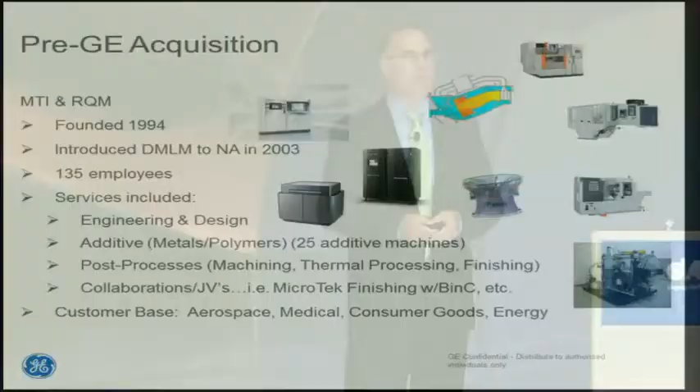That was really kind of the first company to say we're going to take this technology and put it into the production arena. And we were able to do that, and I'll get into this, because we found confidence in the technology. But in November of 2012, GE Aviation acquired both of our companies, and we rebranded ourselves.

So now what was Morris Technologies, we now call our Additive Development Center. The mission remains the same — we have prototyping, R&D activities, and then RQM has been rebranded our Lean Lab. GE has a series of Lean Labs, and that's the industrialization and productionization of the process.

So it's basically taking the process, or any technology, any of our advanced manufacturing technologies, and moving it from R&D, starting to scale, and basically handing it off to a production facility. So that's how we look at our progress, or how we look at advancing technology through the corporation.

We're very lucky that we have the Global Research Center. They have multiple sites around the world. We deal quite a bit with Niskayuna, New York, and what they do is a lot of TRL and MRL levels 1 through 3.

In the additive space, that's where they sit, and then the Additive Development Center for Aviation really looks at those TRLs, MRLs, probably about 3 to somewhere around 6 or 7. And then our Additive Lean Lab takes it up right before production, TRL 9, and hands off at that point to our production site.

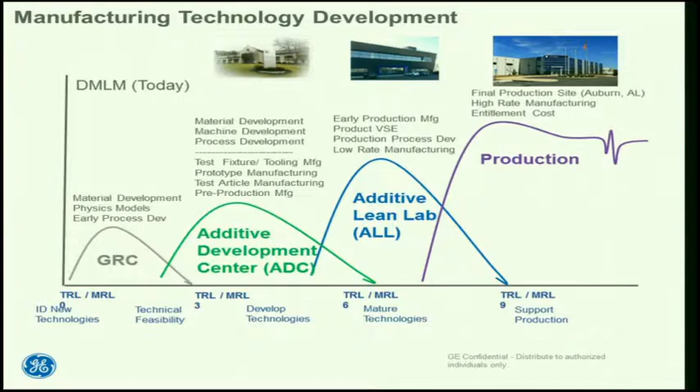So we have the GRC, we have the ADC, we have the ALL, we have our cousins in Italy that are very focused, a portion of their business is focused on additive and electron beam melting in particular. And then just a couple of weeks ago at the Farnborough Air Show, we formally announced where our first production site is, and that's going to be down in Auburn, Alabama. So that is where we will produce our fuel nozzle, which I will also talk about here in just a minute.

GE Aviation has clearly been leading the charge relative to additive internal to the larger corporation. But as everybody probably knows, GE is a large industrial conglomerate. So we have businesses in power and water, healthcare, oil and gas, transportation, appliances, and all of these businesses are starting to leverage and use additive technologies. That can be additive metals, polymers, and other types of materials.

The point is, all of our businesses have really started to leverage this technology in a variety of interesting ways. Some are using the technology more for the prototyping part and phase of the process. But folks like power and water, oil and gas, and aviation have not only leveraged and used it for prototyping, tooling and fixturing, but we are clearly taking the technology into a whole other realm, which is production and direct production of components using additive. In our case, the first parts we'll have on our engines will be additive metal components.

So look, I don't want to make an assumption about everybody's understanding and familiarity with additive. So let me, for those who are familiar, just give me a few minutes to go through this. But really, the technology works in this way.

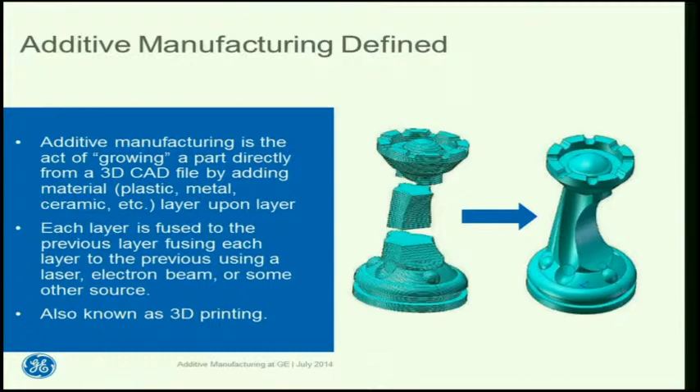Once that part has been completed and built, we then pull it out of the machine. We typically go through a post-thermal processing, so a stress-relieving operation, typically HIP, solution heat treat, that type of thing. Once it's through the thermal processing, we pull the parts back. We typically will have some post-machining to get good fit-up capability and tolerances in certain areas. We might hand bench the parts to get a better surface finish. Then we inspect, and then we can ship the parts.

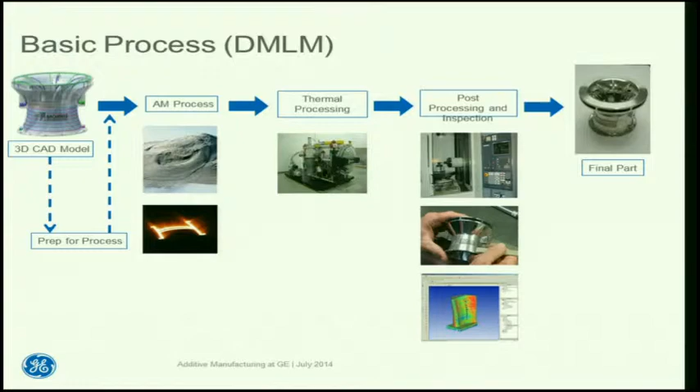Depending on the complexity, parts can be large, they can be small, they can be complex — typically complex and typically small right now given the state of the industry. But once that's done, we're able to ship parts within perhaps a couple days up to, say, a couple of weeks. I'll go through a few examples where the timelines are a little bit longer depending on what the project was. All right, so if we can go ahead and roll the first video here.

What I want to show you on this video is, in essence, the electron beam process. There's no sound on this, so you get to hear me drone on through this video. We're going to take an example — of course, we're aviation, and I'm borrowing this from Oak Ridge. They didn't do this for us, but I'll take this example of a turbine blade.

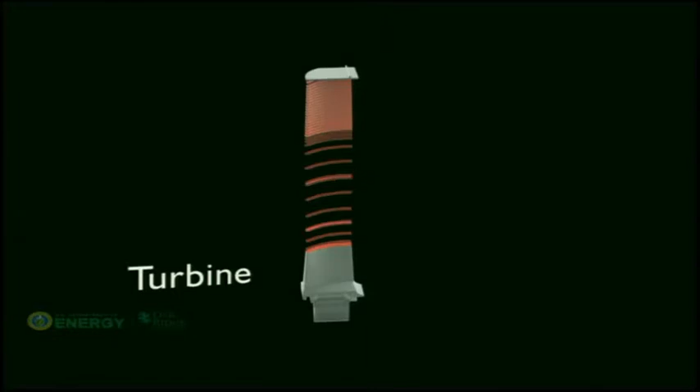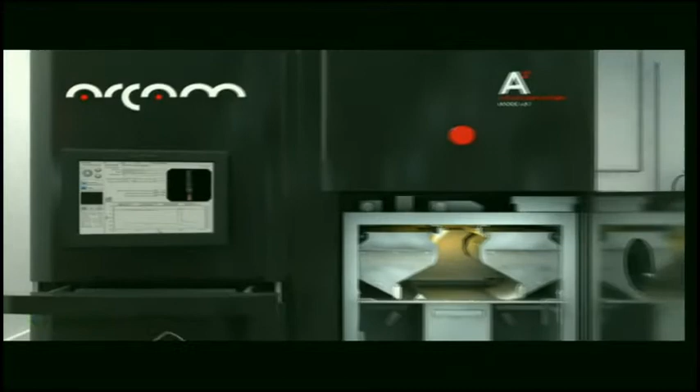If you take a model of a turbine blade, we slice that part up into thin layers, and you can see that's being done on CAD right now. That part is then downloaded to the machine. Now, the way the electron beam technology works is it goes into a chamber where you have those buckets that are coming out.

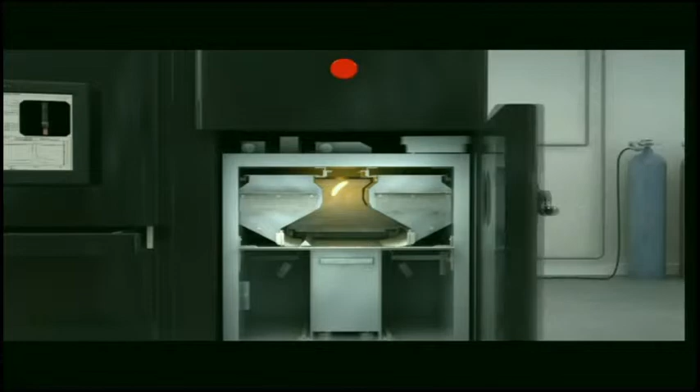We fill those material dispense areas with titanium in this case. We close the door, and the electron beam works under vacuum, so then we pull vacuum.

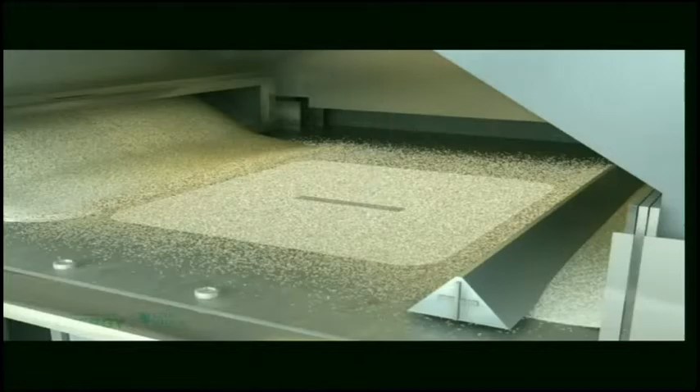That helps us eliminate oxygen, et cetera. The first layer gets swept over, and we preheat every layer. That's one of the unique things about electron beam technology—you can preheat each layer and then precisely come down and melt in the X and Y the area you want to form. That process repeats itself.

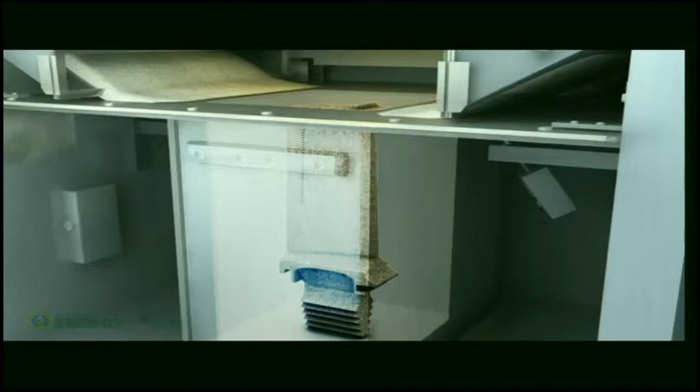The preheat allows us to work with alloys that would crack, things we couldn't easily work with in laser-based processes. Of course, we can work with titanium, Ti-64, in laser as well as EBM, but in some geometries it's faster in the EBM process.

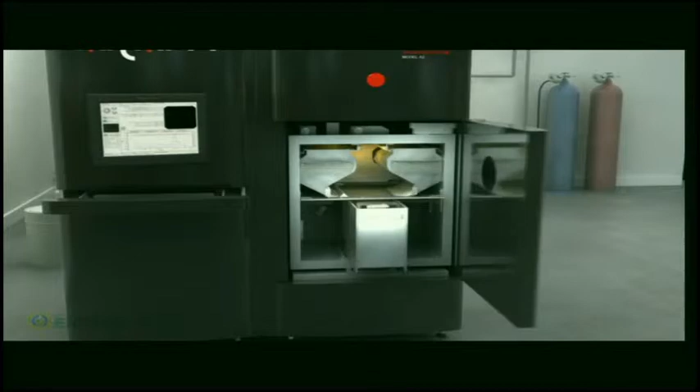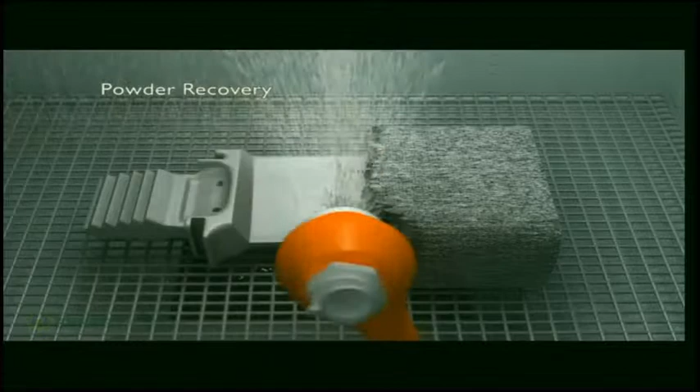Once the part's done, because we preheat every layer, one obstacle is that it comes out as a brick, because the material that wasn't fully melted needs to be blasted away using the parent material. Once that brick is removed and goes back to powder form, you're left with your solid part as a three-dimensional component.

The beauty of that is with Arcam and EBM technology, we can build things very quickly. We're dealing with 3,500 watts of power, directed much like a TV cathode, so it can jump the beam very quickly. Contrast that with laser, which typically has 200 to 400 watts of power in their machines.

There are pros and cons to each technology. I'll tell you that, in my opinion, not one technology is the winning technology. I think they each have their areas and their niche where they should play. I just used that video because it illustrates the general process of additive and slicing files, et cetera.

Let's talk a little about some of the different types of additive. On the polymer side, this isn't comprehensive at all, but the well-known technology that sort of started things out in the 1987 timeframe is stereolithography, or SLA, created by a company called 3D Systems and a gentleman named Chuck Hull. Other technologies have come from that—fused deposition modeling, selective laser sintering, and the polyjet technology.

All of these are polymer oriented. The materials you typically see are like plastic injection mold materials—ABS-like or polycarbonate-like. In FDM we can also do ULTEM. In fact, in the Additive Development Center at GE, we have the ULTEM material and fused deposition modeling—we have all of those technologies except selective laser sintering. Our appliance cousins have the SLS technology.

The beautiful part about these technologies is we went from an industry where, in the early days with our first SLAs, we'd produce components that would shatter if dropped a few inches off the table. They were very brittle, and the material properties weren't very good at all. Still, it was revolutionary to hold a complex part in your hand, but nowhere near where we are today—the materials we have today are highly functional.

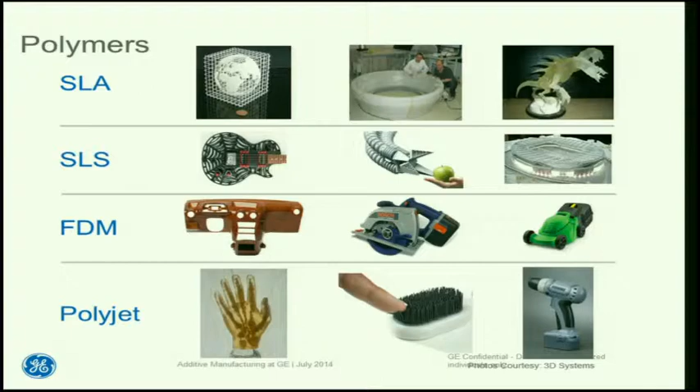We see people using these materials in a variety of applications. Within GE Aviation, we use plastics for a lot of fixturing, and some early tooling—for example, with advanced technology like our CMCs, we can use it to make early tooling. It's not as accurate as the final machined steel tooling, but it gets us far enough through the process to get early looks. There are also a ton of other technologies coming out—I'm not trying to be comprehensive here, but nano is another area that's very big.

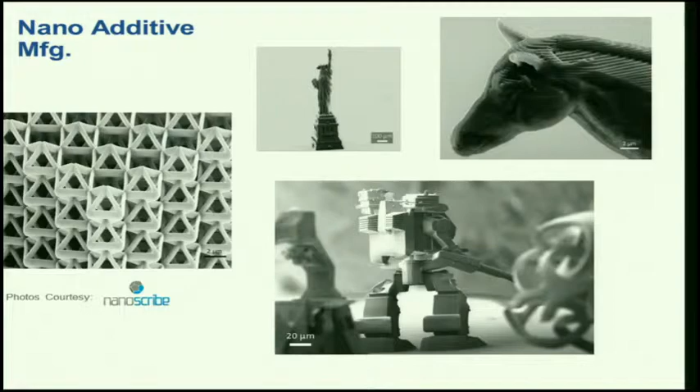So it's hard to see the scale here, but that horse head, that little line on the neck of the horse, that's 2 microns. So you can see that nano additive is another technology that some industries have quite a bit of interest in. The medical industry is a good example. We also see other technologies where we can print in color.

So no, that's not a real orange, and it's kind of a spooky face. But basically what happens in this technology, it's paper-based, produced by a company called MCOR. You can take normal 8.5 by 11 sheets of paper. They bond one layer to the next with glue, and a little knife comes around and cuts the profile of that layer. It also cubes the rest of it, and you pull the cubes away after your build. But you can print in color, so that gives you some capability.

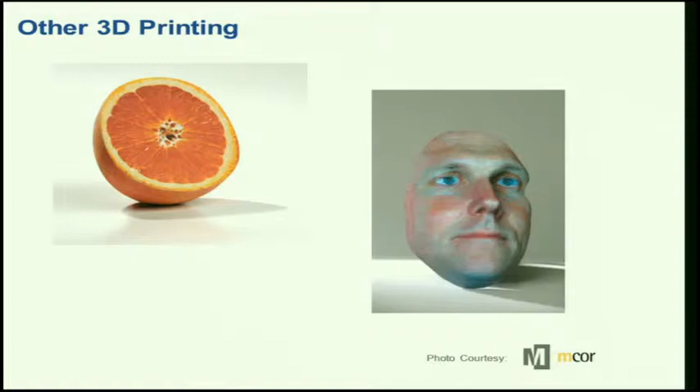Now, we don't use this technology in aviation, but you can see where if you were trying to do a 3-dimensional representation of an FEA model or something, this is a pretty inexpensive way to go. So technologies like this exist as well.

On the metals front, this is where I will spend more of the presentation time and where we see more of the applications within GE. The metals are very broad. I'll get into more of the machines, but you can see the type of applications.

Most importantly, if you look in the middle picture and see that organic bird bone-like structure component, that's the kind of thing our engineers and designers are starting to look at more and more. It's not how I've designed and created things in a traditional manufacturing methodology. We need to think about how nature wants to potentially drive the design and the mechanics of what that part should look like.

So in the case of the middle part, imagine if that had been a solid part with tubes coming in one side, maybe it was a casting before. If we can still get the same mechanical properties out of that part but reduce the weight by 50% or more, we have a substantial benefit. And on any kind of flying hardware, whether going up in space or to a commercial or military application, weight and fuel savings is a tremendous opportunity that we're actively looking at.

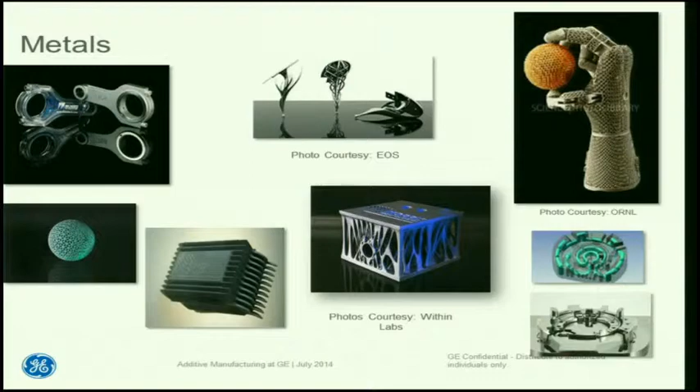There's other pictures up here, some unusual designs around heat exchangers. You can see a tooling example where you have conformal cooling. So for those who get involved in any kind of tooling, whether for plastic injection or other, you can see where that could be very beneficial to reduce your cycle times.

When we talk about metals only, this is something important to understand. When we first brought the technology of direct metal laser sintering over to North America in 2003, this chart would have had maybe a couple of boxes on it. This chart now has a number of boxes, a number of modalities.

So we have direct and indirect to metal. In the direct, we have a number of different capabilities beyond just laser based. We have laser base, we have EBM base, we have powder bed, we have powder fed or powder injection, we have wire fed. So there are a number of different metal additive modalities.

One of the important things to understand is that no one technology, no one manufacturer or OEM of these technologies will probably fit the full spectrum of parts you might want to make in metal. So it's really very important to understand the nuances, the pros and cons of each of these.

By and large, broad brush, the powder bed laser-based technologies are more prevalent by far as an installed base in the world. I think you'll find a growing number of the electron beam in different forms starting to come out. And I think you'll start to see some of the hybrid machines and some of the laser-fed or powder-blown type of technologies increase in popularity, mainly because you can do larger structures and near-net shaped parts with those.

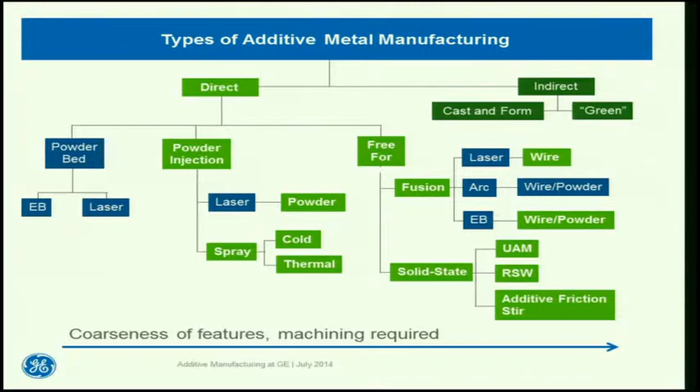So, great technology. We look at it as being disruptive. We look at it as being very enabling. But I will tell you that design matters a great deal, and I touched on this before. Let me give you an example.

On the left, what you're looking at is a traditional, what we call panel-style rake. That's an instrumentation probe that we put into our test engines. So that rake takes data. It collects data such as temperature, pressure, or emissions. What you see is the completed rake, and then a cutaway of what's inside. It's called panel-style, you see little panels in there.

That's not a traditionally manufactured one, it's actually additively produced. But it was designed to be traditionally manufactured—tubes bent, sheet metal bent and folded and welded, fabricated basically. So it was really a multiple of parts coming together that were fabrications to create this rake.

Back in 2005, we were approached by one of the engineers in our test facilities engineering area, giving us this file and saying, can you build this part? We said, sure, we'll give it a shot. So we tried, and the machine promptly crashed on us. We restarted, did some tweaks, and restarted another build, and that crashed. I'll save you all the multiples, but it came down to about 11 or 12 tries before we finally got this thing to build, with a lot of little tweaks to the design.

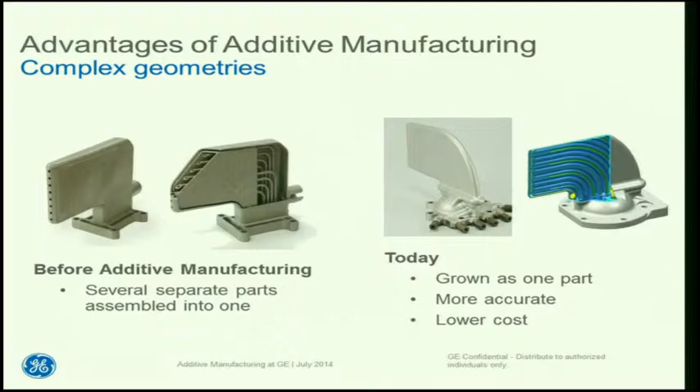And this has been very, very successful. We have all the functionality—in fact, an even better rake. It costs less, we have fewer rakes to make because it lasts longer in the test, and we have better cooling of the skin. We put all this complexity into the rake and have a very sophisticated piece of equipment that can grow first-time yield. It's a very interesting path and a good story about how you generally can't just take a traditionally designed component or assembly and expect to additively produce it. You will probably need to design around some things.

So fast forward, taking some of that concept of designing differently—some of you may be aware that about 6 to 9 months ago, maybe a year, GE went out and did a design innovation quest. We went out to the world and said, okay, here's one of our brackets that we use—you can see it has a little GrabCAD logo over it. Here's a bracket we have in aviation today.

It's kind of chunky and big, and here are all the constraints we put around it. So we went out to the world and said, can you, those signing up on GrabCAD to look at this, come back with a design for this challenge that you think will be lighter but still meets all the mechanical requirements of that particular bracket?

We had over 680, probably closer to 700 entries that came back. We took the top 10 and actually produced and grew the designs that came back. You can see some of those—they really are very creative.

Some of these were engineers, some were non-engineers. These are people coming from all different industries. They were not just aerospace—in fact, the majority were not aerospace.

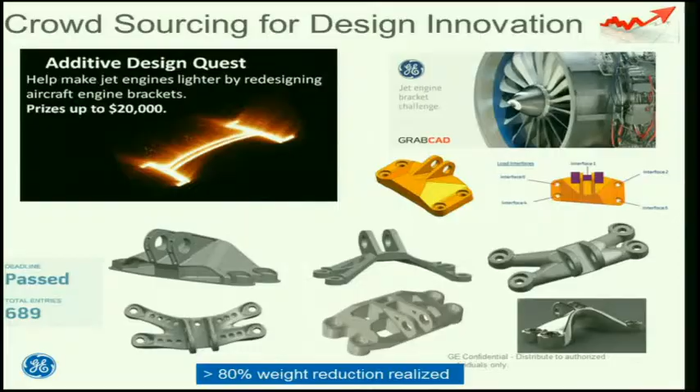So what we had was a community of people globally coming back and saying, okay, great, yeah, I can take that bracket and take a lot of weight out. In fact, we saw roughly an 85% reduction in the weight of that bracket versus how it was traditionally designed at aviation. Applying additive concepts, we were able to reduce the weight and keep all the mechanical properties.

I don't think I'd be here talking, and I don't think we'd have all the things I just showed you, if it weren't for the materials we use and the great properties we're getting out of these materials. So I'm going to make a very broad brush statement, and this is dangerous, but I'll do it anyway.

So the materials typically that we see coming out of the machines are wrought-like in their properties. I'll have a few slides following here which I'll show you.

They're wrought-like in their properties, which gives us a huge amount of flexibility. So all of those parts that have been castings, we feel very confident, with the exception of maybe very, very high-end, like single crystal castings. But most castings, we feel very confident we can take this technology and apply it to those types of parts.

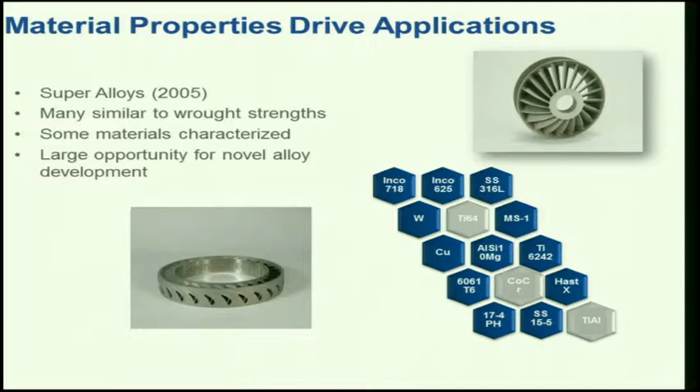In aviation, as many of you would expect, it's a lengthy and costly process to develop your material curves. So we really only have a few that have been fully characterized and that we have our curves on. However, there are a number of alloys that we work with in prototyping, which are perfectly fine, and then we have others that are not up here that are in development. I'm aware that a lot of work is being done at universities, industry, and the government on some other alloys that would be quite interesting.

So let's take a look at a couple of these alloys. This one happens to be cobalt chromium, and I'm not a metallurgist, so I'm not trying to take a deep dive here. In fact, I'll go pretty quick.

There's a reason I don't show high cycle and low cycle fatigue, and that's because it does get a bit of a debit, and that is due to the surface finish that you have on internal passages.

So, of course, one of the advantages of the additive technologies is you can make these really complex parts. You saw a few of those. Our fuel nozzle is a classic example of how we have this very complex internal geometry. So that's great, but it's not so great that I have a rough surface finish on the inside. That does give me that fatigue debit.

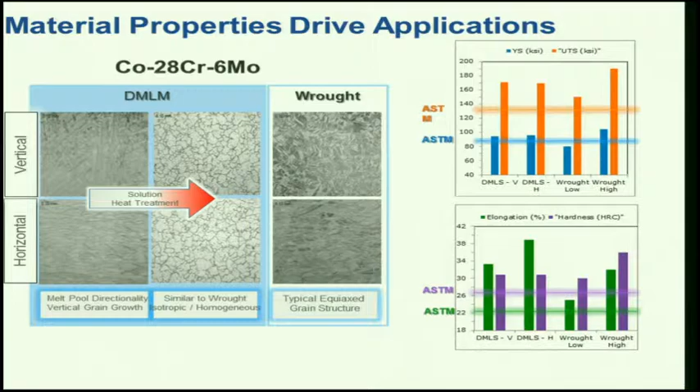So you would see that lower than ASTM standards in this case, and it would not meet the wrought type of lifing. However, the beauty of additive is you can design around that in many cases until we come up with some really good solutions on how to finish internal passages. External's not a problem, it's the internal that's usually an issue.

All right, this is Ti 6-4, similar kind of graphs and similar eye chart in some ways. And once again, you'll see how I've now included EBM. I've got laser-based and DMLS technology represented. And once again, the grain structure looking very similar to what a wrought grain structure looks like.

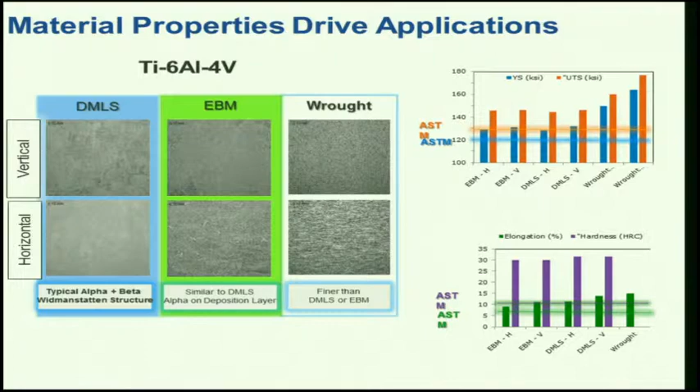So, you know, we have varying degrees of how close to wrought we get, but I would say, again, very broad brush, we certainly get better than cast, and you can understand the benefits that could bring.

So let's switch gears, talk a little bit about what we're doing at GE. So the first thing at GE Aviation in particular, first thing I would tell you is we have a number of machines that we work with. So on the polymer side, we've got SLA, we've got FDM, we've got the PolyJet technology.

On the metal side, we have 5 different modalities we work with at our aviation site. So we have manufacturers of equipment: EOS, SLM, Concept Laser, Phenix, and the Arcam technology.

When GE bought Morris Technologies and RQM, we predominantly had the EOS technology, with a couple different generations of machines. We had about 20 of the metal machines when they purchased us, so we still have predominantly the EOS technology.

But we're very interested in trying to understand the nuances between these technologies. Seemingly, you would think you'd get the same output from a machine that has a similar laser, operates in a very similar way, with similar powder size and morphology. So why would the output be different? It is different, not dramatically, but it does have differences, and we're trying to understand what those little nuances are between the technologies.

I suspect some of it's the software, how the laser is driven, where the laser jumps around on the platform. But there are probably a few other hardware reasons as well.

We also have on the polymer side, I mentioned we use Ultem, that's through our Fortus FDM machine. And we do use the SLA and the PolyJet for some cold type test models, as well as mock-ups, and then also a lot of fixturing. So we've been able to find a number of applications.

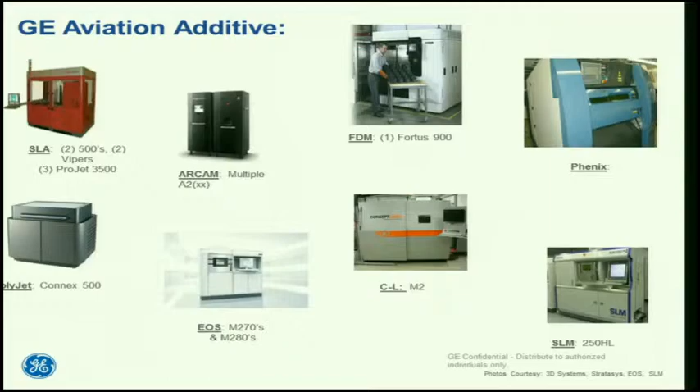In fact, in Cincinnati, there's a company that worked with Oak Ridge National Labs. The company is called Cincinnati Inc. They are known for their large fabrication production-oriented equipment. They've married up to create what they call BAM, a big area additive manufacturing machine, I think. It's very big, probably the size of this stage, and it can lay a lot of material down very quickly.

So they use an ABS with a carbon fiber impregnated into that, and they're having some very good success making big parts that are near net and that are composite. So we'll start to see more of that in the future, I think.

All right, so we talk a lot about the machines, and they are the heart of what we typically think about when we think about additive. But historically, as Morris Technologies and as aviation, we recognize there is a lot on the back end, after the parts come back from thermal treatment, that you have to be very proficient at.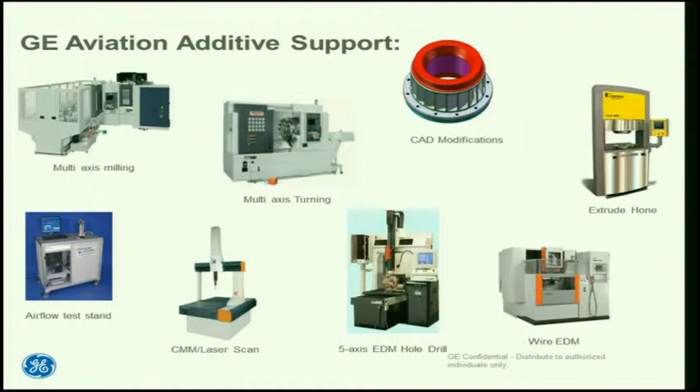Let me say that differently: if you don't have machining capabilities and you're jumping into the additive metal game, you will find it exceedingly difficult to play in that game. You have to have very competent and good capability on the back end, whether that's EDM, CNC machining, or special processes like extrude hone, laser scanning, or even special finishing processes. You have to have the full capability. If you don't, then you will have a rough time getting parts turned quickly.

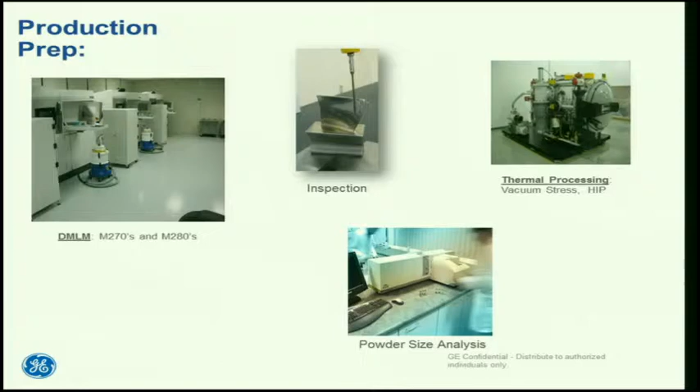And then a couple of things around our prep, industrialization, and production prep. So we have our machines typically live in a controlled environment, not a clean room, but a controlled environment. We have capability on the thermal processing, and we also have capability when it comes to powder size analysis. I will tell you that the morphology and the particle size do matter greatly in these technologies. So monitoring the health of your machine, monitoring the health of your feedstock, all of those things become very important as you think about going into production.

So we have been there, we are on that journey, and it's very interesting to see all the differences between prototyping and production. There are a number of them, and a number of things that have to be T's crossed and I's dotted.

All right, so I think we know hopefully a lot of the advantages of additive. One of them is clearly a huge time savings: the ability to take that schedule we all have for producing components on a project and move some of that back to the left. That becomes a cost savings too.

But on numerous occasions, we have been able to demonstrate we can take things that were going to take weeks or even months and reduce that down into days or weeks.

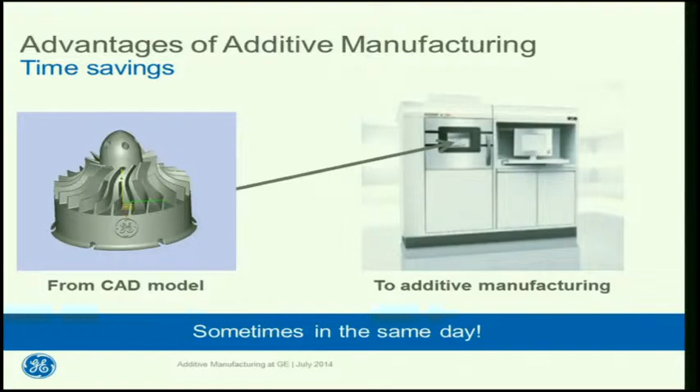High pressure turbine blades typically are produced as a single crystal casting. They have very extreme environments that they live in, and to date we have not seen additive be able to live in that environment for high pressure turbine blades. There are other parts of the engine, like low pressure turbine blades, that might be a good fit, but not high pressure.

However, for test purposes, where we only need to get roughly 300 hours of testing in order to get the data we want, high pressure turbine blades produced additively is a huge cost and time saver. So we can take what normally would be a 12-month cycle to produce those blades and squeeze that down to potentially about 3 months. That's a huge time saver.

And then, of course, we can produce parts that have high complexity to them, like our fuel swirler for our power and water cousins, or a combustion component. So we use the technology internally at Aviation quite heavily for our new product introduction or prototype hardware. That's a big application of how we use it.

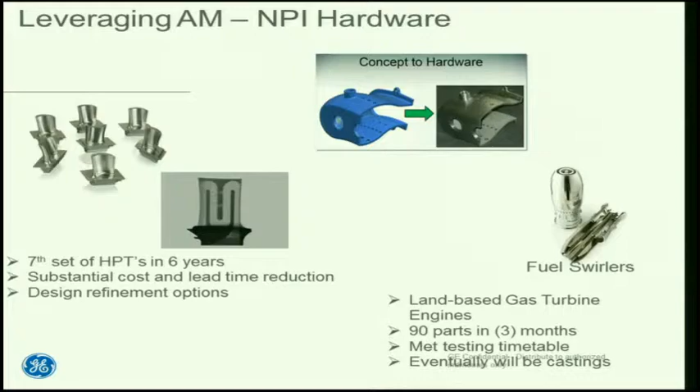But we're not stopping there. In fact, when we look at an engine, we look at a lot of different areas where potentially the technology can be used. I won't go into all the different items on our docket that we think will be the next product to make it to production.

But these are areas in the engine that I think are worth looking at for additive. They range from the compressor area to the combustion, some of our structures, certainly externals, although not HPT blades, but LPT blades potentially, and various installations. So a lot of areas in the engine are great candidates for additive.

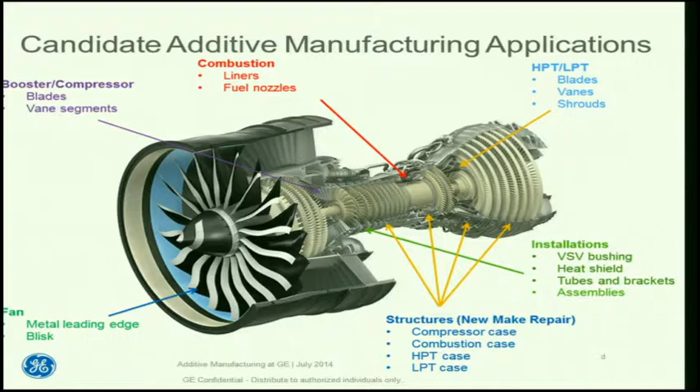And we are exploring, as others involved in this business explore and look at the different components.

One of the best applications of additive isn't just taking that part you might cast or create some other way. It's trying to look and say, if I have 5 or 6 different parts that I currently machine, cast, weld, and braze into an assembly, can I go from that and make the whole assembly as one part grown? There is a lot of capability for the technology around that particular front.

And of course, optimized structures is something we look at. If we can drive even a pound out of a component, we look pretty hard at that because that has substantial benefit to our customers in weight savings, thus fuel savings, and cost savings across the fleet for the lifetime of that engine. You're talking about very long lifetime engines, 20, 30 years in service. So reducing weight is a very big driver of why this technology makes sense, not just for us, but for our customers.

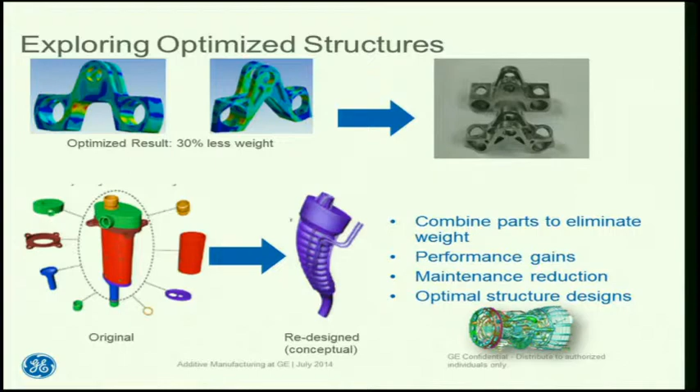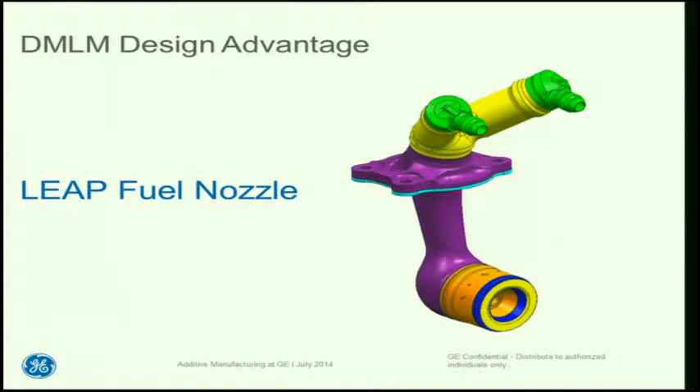So let's talk about the fuel nozzle. This has been relatively well publicized at this point. It's a great story, and it's been a very big success so far, and we're just on the verge of taking that into production.

The fuel nozzle comes out of the combustion area. For our LEAP engine, which is the next generation LEAP, the bread and butter product of GE and CFM, the engine has 19 fuel nozzles each. We're in the neighborhood of around 7,000 engines sold, and we're ramping up across the entire supply chain and organization to start producing these engines.

These engines have composites on them, they have CMCs on them, and a lot of advanced manufacturing embedded in various ways. It's a phenomenal engine, a technological marvel, and it's very exciting that additive will be at the heart of the engine in the fuel nozzle, delivering fuel into the engine. There's 19 of these per engine, which means when we hit full production, we're going to have to produce 40,000 of these nozzles a year.

That's not automotive quantity, but for the aerospace industry, that's pretty good quantity. And the complexity and criticality of this component in the engine make this a huge undertaking. So why did we go down this road? Why did we even consider taking additive and leveraging it into one of these most critical components? Because this first part that's going to be in a production engine is the fuel nozzle. It's not a mundane bracket, not some component without much criticality—this is a very critical component. So there's a convincing reason.

One reason is that we were able to take what was 20 cast pieces that were machined, cast, welded, and brazed, and our talented designers and engineers reconfigured that design for additive. They got it down to one part that we're going to grow. It's an absolutely phenomenal, almost artistic design on the inside—very elegant, with snaking passages going all over the place.

Because of that, we have the ability to treat this like a very efficient heat exchanger, and that effect gives us higher durability—we're estimating roughly 5 times durability. That matters because it means less time off wing that our customers have to endure. So there are a lot of cost reasons and performance reasons why we went down that path.

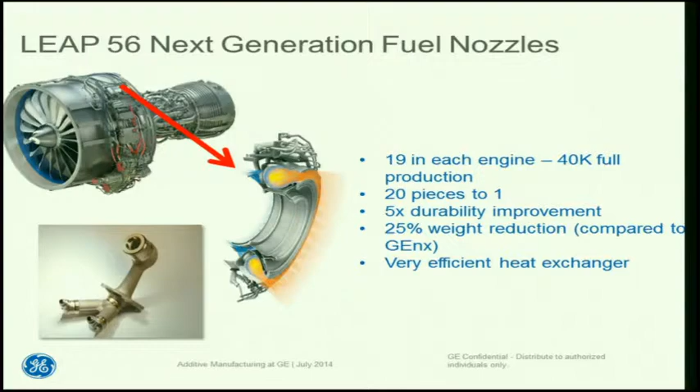Compared to our previous generation fuel nozzle on our GEnx engine, we see a 25% weight savings. Once again, a huge benefit being able to reduce the weight of each fuel nozzle—multiply it by 19, and you've got a significant win.

As I mentioned, we're in the process of ramping up to around 6,600 LEAP engines—I think we're getting close to 7,000 at this point. With entry into service in 2016, we're at 2014, and we have a lot of things in motion right now.

We have our facility picked, we've started placing orders for the production machines, and we have all the other surrounding items that come along with producing a component. The quality side becomes very critical and important—how do we inspect these parts? What kind of speed can we inspect them with?

We're well on the way to having these installed and ready to go. That's not a 6-month journey—that's a good 5-year-plus journey with all the other items. The testing of the materials and the testing of the components has been a 10-year journey.

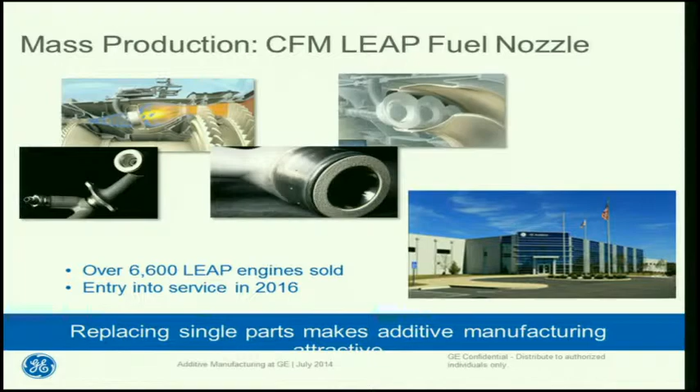Right now we tend to think about this technology in a certain way, and the media does a good job of this. In the last year and a half, two years, we see a lot of activity in the media talking about additive, like it can do anything and everything—everyone's going out of business unless you're doing additive.

The technology is really based on some fundamental things that, at least for GE Aviation, we've been doing for over 25 years—powder metallurgy, lasers, CAD. These things have been around a long time; we're just putting those three together and controlling them a bit differently. We have deep experience in powder metallurgy and laser processing. We've been doing repairs for over 25 years using lasers and powder, and this technology itself, using machines I showed you before, we've been doing for over 10 years.

Through that period of time, a lot of it's been kept quiet, admittedly—GE didn't talk about this for quite some time. But for over 10 years now, we've been qualifying the process, understanding our upper and lower limits, and understanding where the failure modes are for these machines when ramping up to full production. So when we're headed into production, this didn't just happen last year—this is something that's been coming for quite some time.

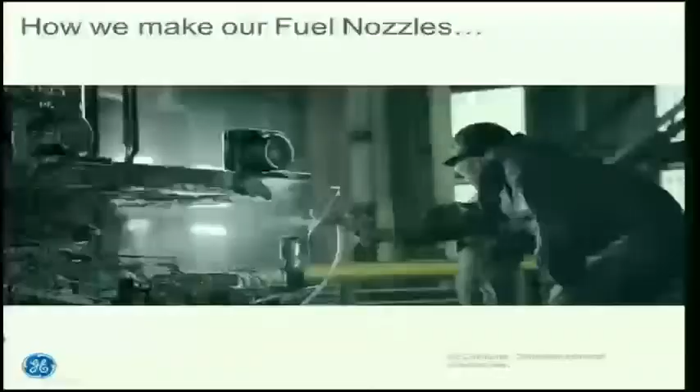And making something stronger will mean making it lighter.

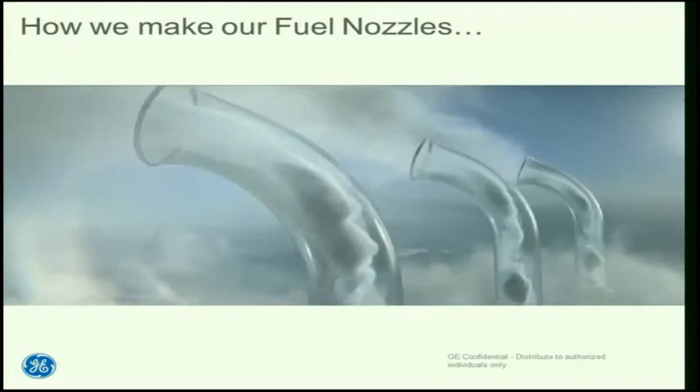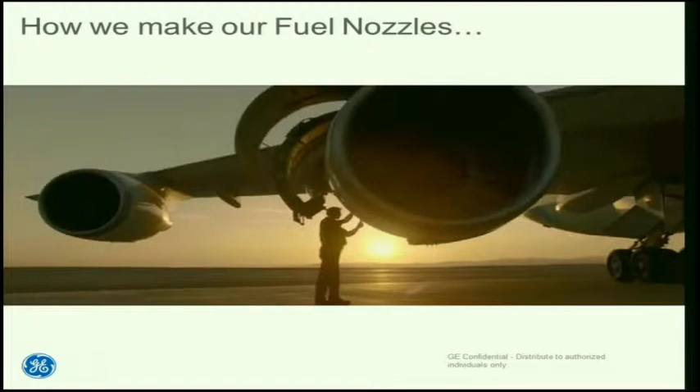One day, factories will work with the cloud. One day is today. So there it is. That's how we make our fuel nozzles. They drop right from the cloud. All right, I work in the wrong department, I got to work in the marketing department. Those guys have way too much fun. I think they're based in Colorado.

So yeah, so that's fun, right? But it kind of does us a bit of a disservice because I think certifying agencies look at that and have a heart attack, and then we have some explaining to do. But anyway, it's neat to see that happen.

Well, I'm going to go on to a little different type of thing, and this is again back to the media. How many, just out of curiosity, if you don't mind raising your hand, how many saw a YouTube video or heard about somebody who made an actual gun you could fire out of additive? Yeah, a fair number of you guys. So okay, that was great, and that was nice to do that, and I think it does demonstrate capability of the technology. It really sort of had a big firestorm of blowback because people were all afraid now that you could additively produce your gun and it was going to be a big security threat.

So, that's going to happen. You can't blame the technology. That's going to happen. People, you can make a gun with a mill and a lathe in your house, so it's just 3D. But still, we wanted a more positive message out there, so we're working on this message. I don't have the exact video, so you're going to have to really bear with me when I pull the video up in a few slides here. It's kind of grainy, it isn't exactly what I want. But let me just quickly go through this.

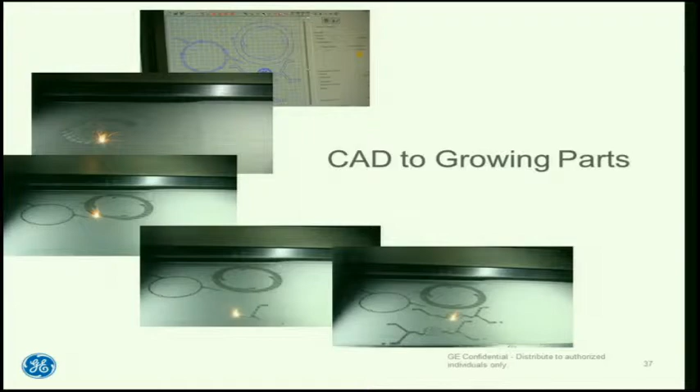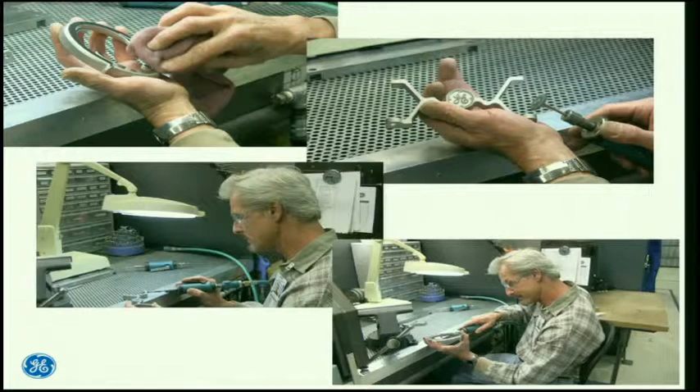Then after build, we did our thermal processing. We pulled them back, put them into our CNC machining to get the right tolerances. After that, we did some hand benching, so we cleaned up some parts. It was only a few pieces. So we have this gentleman, Dave here, who is an extremely talented guy, and he was able to do the hand benching, get us to a nice looking component.

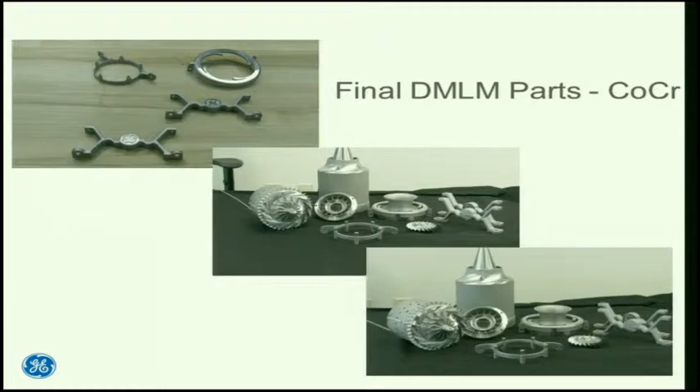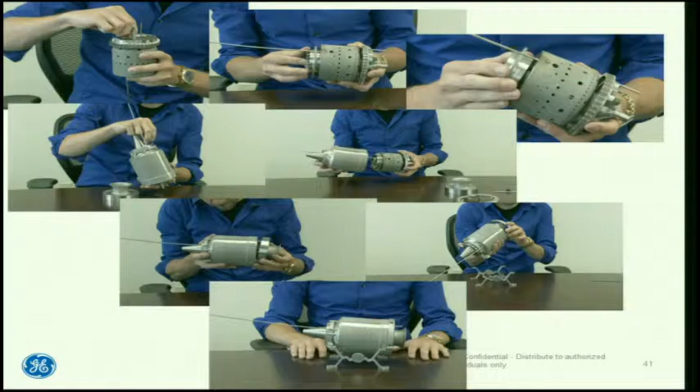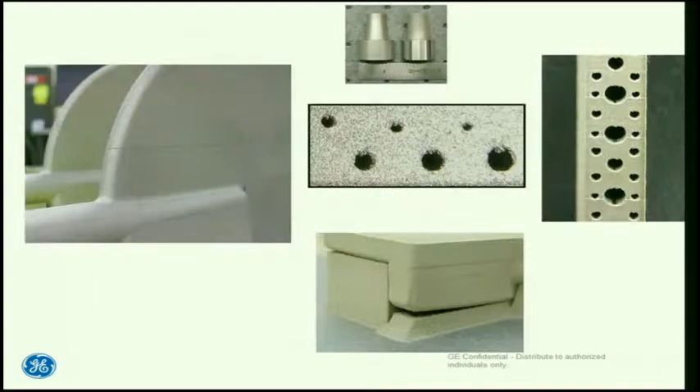These are all things you have to know when you work with this technology. You can nest multiple parts on a build platform, and that can affect the build and the quality of the parts. You have to be aware of what all that is. There are some things that happen that you just need to know about.

For instance, you get a witness line on that rake when you have a power outage. Why does that happen? Can you still use that part? That happened because of a power outage - the machine was down for probably 8 hours until we came back in, and it happened in the middle of the night. What you end up having is when you restart the machine, the metal shrinks and you start sintering on your next layer, and you get this witness line.

We did do some testing and felt pretty confident that with the right restart procedures you can keep going. However, we would never do that for a critical component, and we would always have to get permission from the engineer and designer before doing that, which in essence meant we started over.

The other thing you'll get is small holes. You'll tend to get horizontal holes built horizontally, so the layering going this way and the hole that way. You'll get little stalactites coming down from the top, and that's because in laser-based processes the laser picks up a little bit of the particle underneath when there's no supporting layer. So here are some close-ups of some parts - they're not perfectly round holes, they tend to have a little bit of goobers up at the top.

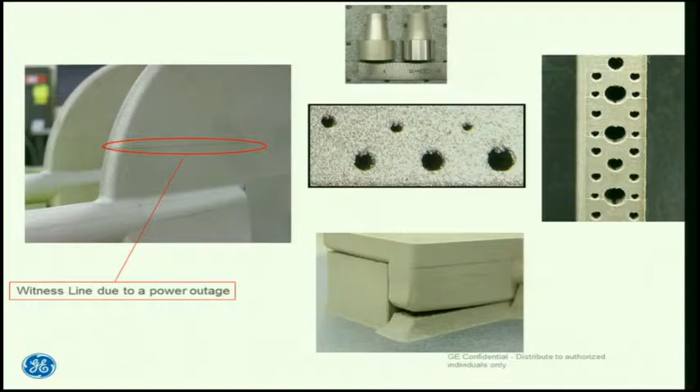You can have thick parts that pull up from the platform, and knowing how to really anchor those down becomes important. Knowing what kind of stock you need to add so you have enough to post-machine to get to your tolerances - those are all elements of the nuances of the technology.

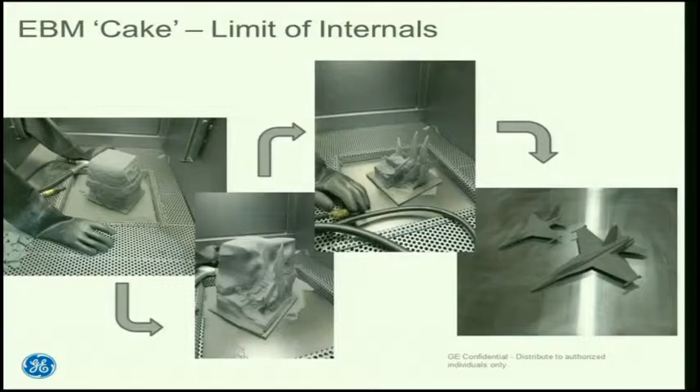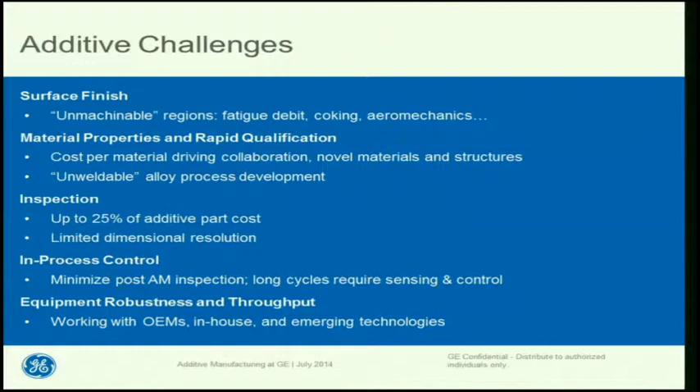So there are a lot of other challenges - surface finish and material properties, rapid qualification, something we talk about a lot, and our universities and government friends are helping on that. Inspection is another big area, which can be up to 25% of the cost of a production part. In-process control and other items like that. So we're doing a lot of activity at GE Research and at GE as a whole, at Aviation and with some of our partners, looking at process modeling.

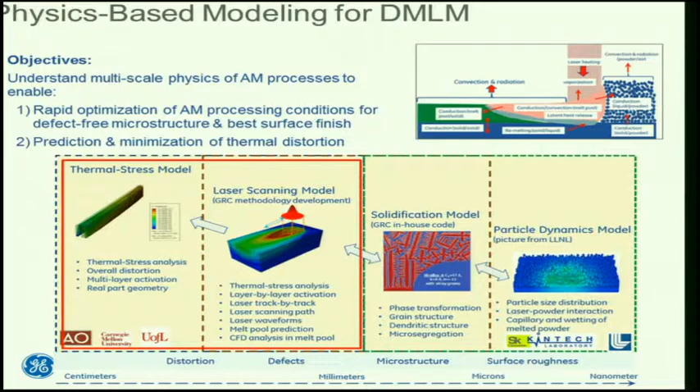We're looking at things about how we can take physics-based modeling and apply it into additive, and how do the models look? This is a very computer and memory intensive type of process.

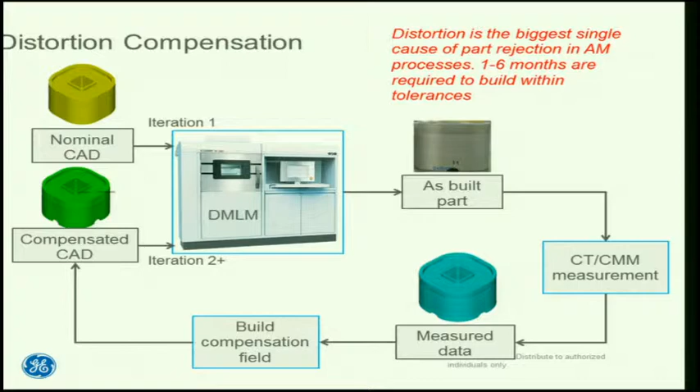Distortion compensation would be great. Wouldn't it be nice to know when you get your model, you can predict what the distortion is and what you need to do to anticipate that distortion on the front end, so the first time you build it, you have a good part coming out. So distortion prediction and mitigation is another topical area we're working with.

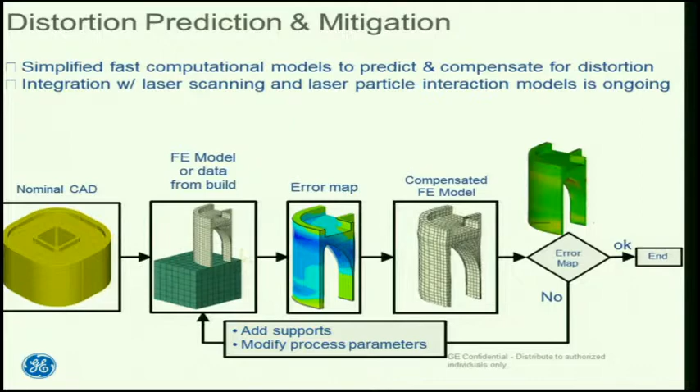There are some topics we're working on with America Makes, not far from here, and we're working with labs like Lawrence Livermore National Labs out in California and some other folks. So basically, this is really interesting work.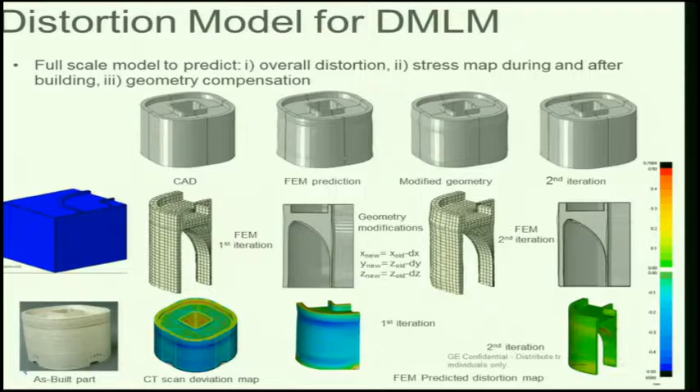Again, it's not easy. There are a number of parameters that come into play: what laser power, what layer thickness, what materials you're working with. So there's a number of different things taking place, and understanding just the process physics is very, very difficult.

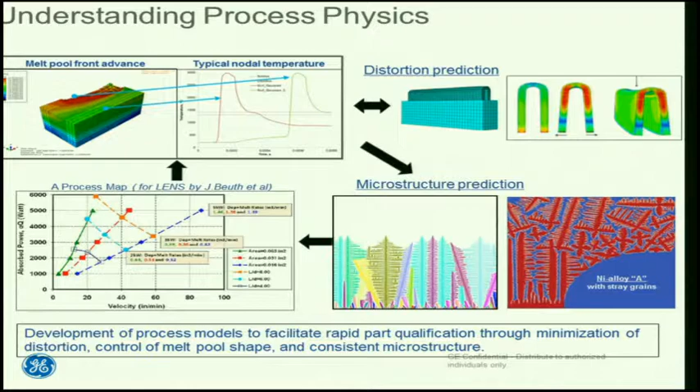It's work we're doing, but it doesn't stop us from going forward with how we're working with our parts. This hopefully will make us more efficient as we move forward in the future, and basically trying to predict, in real time, feedback loops and what our stresses are, et cetera.

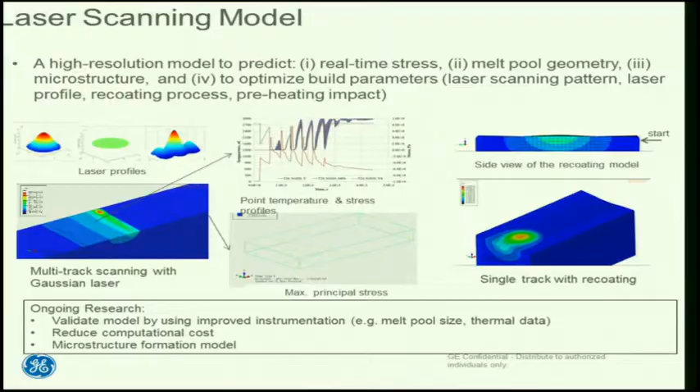So a lot of work is being done with a number of different people, consortiums, collaborations, government, academia, and industry. There are a lot of people globally, as well as in the United States, working on these problems. So a couple of additional considerations.

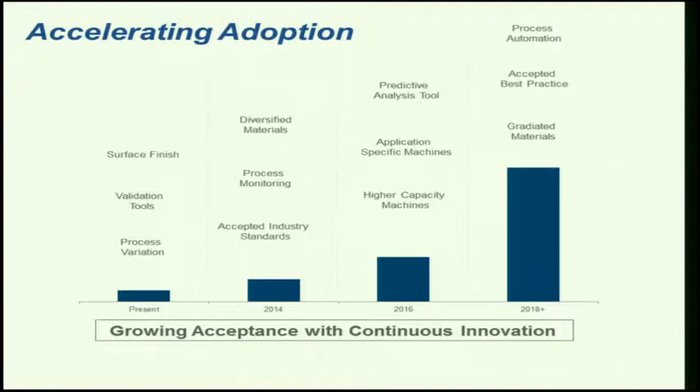Where are we heading? Well, quickly going through this, adoption is clearly accelerating. We're seeing more and more companies realize this is a disruptive technology for their businesses or for the components they make. We have a huge, really neat future coming at us with multiple technology advancements.

So what does that mean? Does that mean our supply chain is going to disappear? If you cast parts, if you machine parts, are we going to see rooms that look like the one out of our additive development center here, with banks of machines just producing parts? My short answer is no, not in our lifetimes.

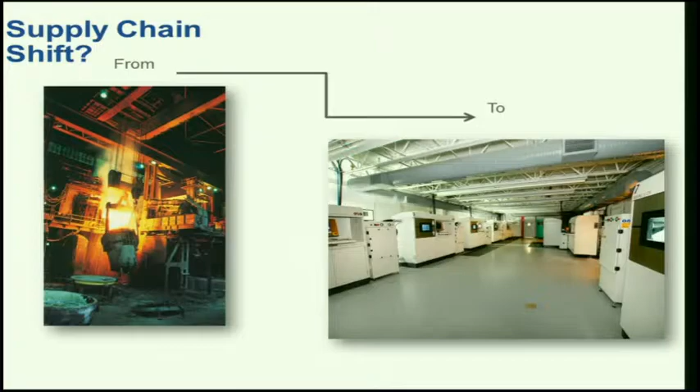You will be fine if you're casting parts, and you will use cast parts, machine parts, and fabricated parts. But you probably will also start to hear and use additive. And yes, we will see production facilities that look like that room, where you have a few people walking around starting builds and taking parts out. You don't have banks of machines with an operator at every machine.

So I think there's a shift, but it's not going to be a dramatic shift whereby we see entire industries disappear. I do think we have the opportunity to take additive more local.

If you're in the oil and gas industry and you're out in some remote location, wouldn't it be great to drop a pod down, and instead of waiting for that replacement part, you can grow the part? If you're in the Navy and you have two ships that sail with you in your fleet that have nothing but spare parts on them, wouldn't it be great to eliminate one of those and just have machines instead in the other ship that can produce a lot of your spare parts?

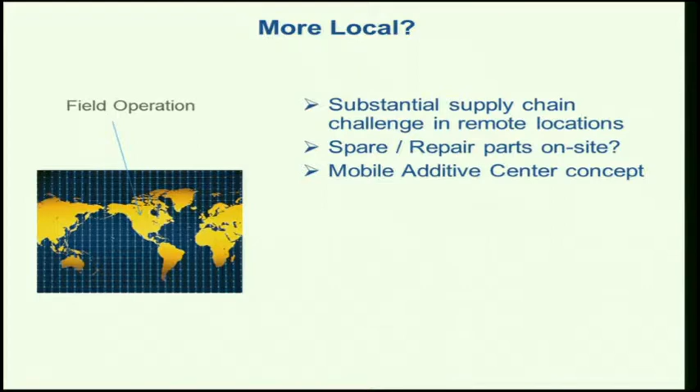Not all, but a lot of them. You save billions of dollars if you do that. And for us in the commercial world, with parts inventory, it would be wonderful to see a reduction in that.

So think about smart planes and smart feedback systems where you know you have a part that's about to fail, and when the plane lands, you're able to quickly put on a replacement part that you grew while it was en route. Okay, that's a little science fiction, a little far out, but the concept is instead of carrying loads of inventory, maybe we can have depots that have machines that can produce parts on demand.

Maybe we can have depots that actually have machines that can produce the parts on demand as needed from digital files. So a lot of work is being done on that front as well.

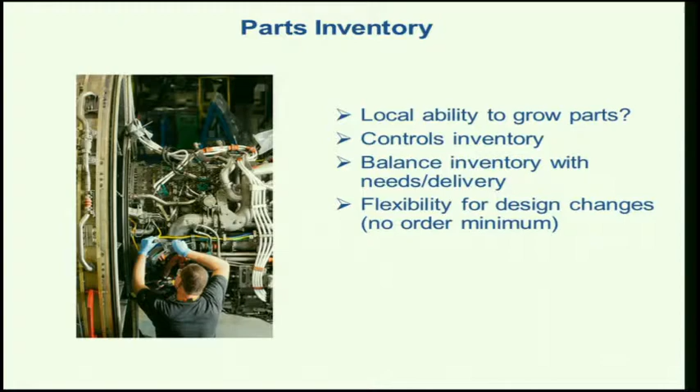Broad trends, we see obviously increased acceptance and adoption of the technology. We're seeing a ton of new business models out there. It's really interesting to see how people think about using and leveraging the technology.

I do see a challenging IP landscape. There tends to be, on technologies like this, a land grab for people just throwing out patents to try to stake out their claims, whether they have things or not. And that can be a bit problematic and hold us back some.

But I think we're starting to see all of these trends, and also consolidation in the industry, of which Morris Technologies RQM is a good example. If you look at our industry, you see a number of companies that have been acquired by larger companies, either in the additive space or OEMs looking to do the same. So that creates opportunity. It also creates some challenges.

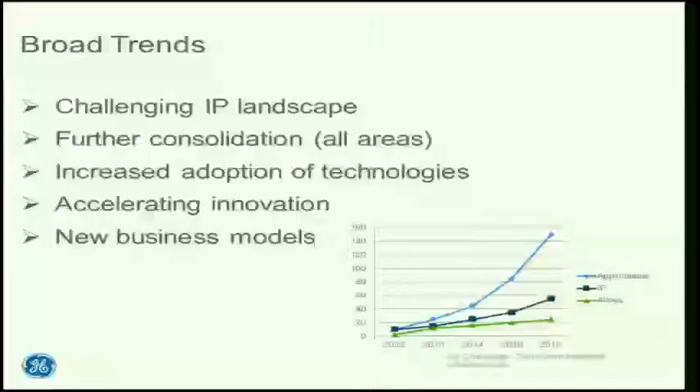I think we're still relatively in the early phase of adoption. It's starting to move into that primary majority realm, and I think we're getting there sooner than later probably. And I think the technology itself is still early on.

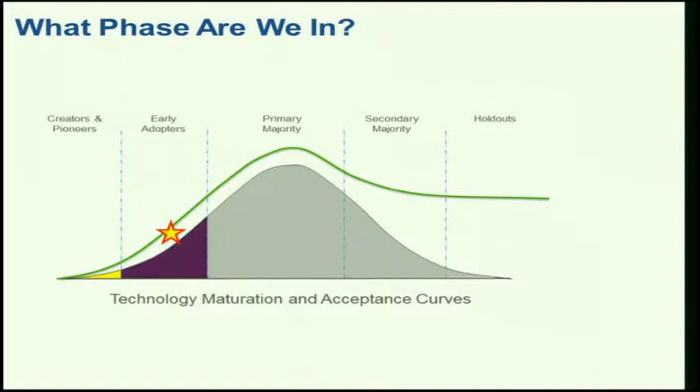So look for tremendous advancements in all the technologies, whether they're polymer or metal. Look for 3 times the throughput that we get today in 5 years. Maybe in 10 years, you'll see 10 times the throughput. All that does is take the realm of possibility of parts and grow it exponentially every time you take it up 1x on the speed and throughput.

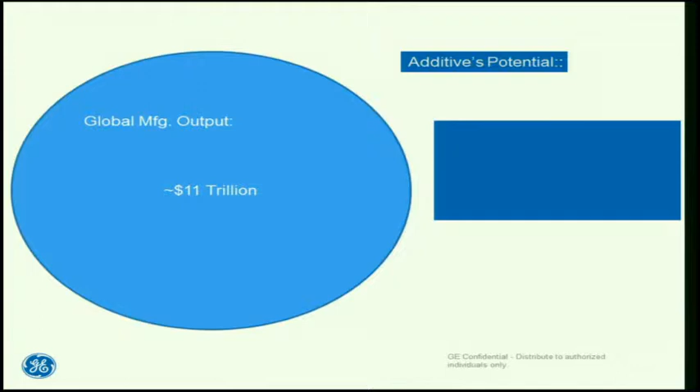So if we look at the total global manufacturing output, roughly 11 trillion in the world globally, how much does our little industry play? It's that little dot that just showed up. And if you look at that, that's roughly 2.2 billion, call it 3 billion even today maybe. So 3 billion is our little industry, which is 0.02 to 0.03% of total global manufacturing output.

So my question is, what happens if it was 1%? If we had 1% as additive in total global manufacturing output, we would be at a $100 billion industry. That's why the valuations of some of these public companies have risen so high. They kind of fluctuate, go up and down, but that's the potential.

So we're a teeny industry. We're $3 billion as an industry, but I don't think in the terribly distant future you can envision a $100 billion industry.

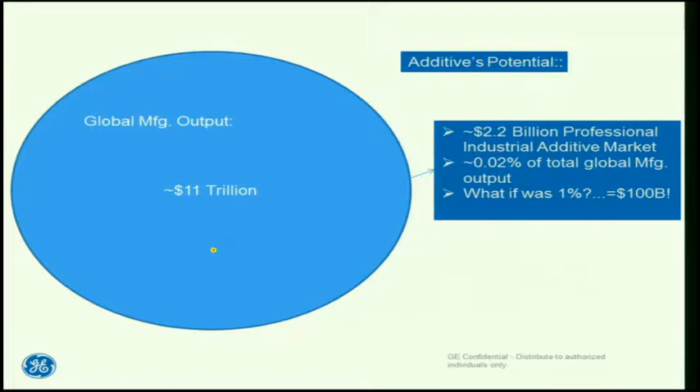So finally, I want to leave you with one last video from our marketing folks, and you may have seen this commercial. It's been playing more and more. They even have a shortened version that keeps the key part of that video in here. So let's go ahead and play that final video, and this should have sound too.

My mom, she makes underwater fans that are powered by the moon. My mom makes airplane engines that can talk. My mom makes hospitals you can hold in your hand. My mom can print amazing things right from her computer. My mom makes trains that are friends with trees. My mom works at GE.

All right, so you caught that part about the engine. Again, that's how we make engines at GE Aviation. They just all fly together and come together, boom, we got it. So, I don't know what the problem is trying to make 7,000 jet engines in a short period of time. Like I said, I should have been working for the marketing team.

But once again, that's a national commercial. And my point more on that commercial was the little girl says, my mom can print amazing things right from her computer, as they show the engine coming together. So when a company like GE is starting to put out these big marketing campaigns, even though they might be a little bit futuristic, I think the point is it's mainstream, it's real, and we certainly believe it is an enabling technology that we expect to see in many components on our future aircraft engines.